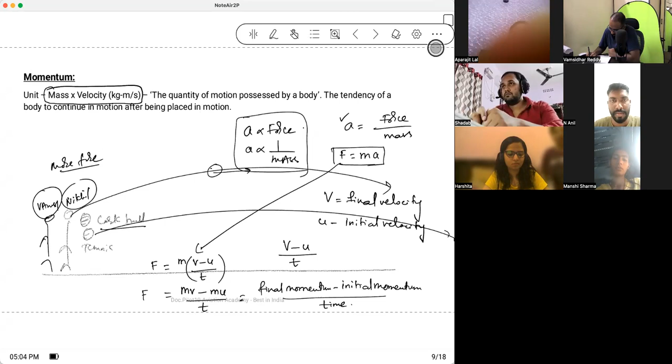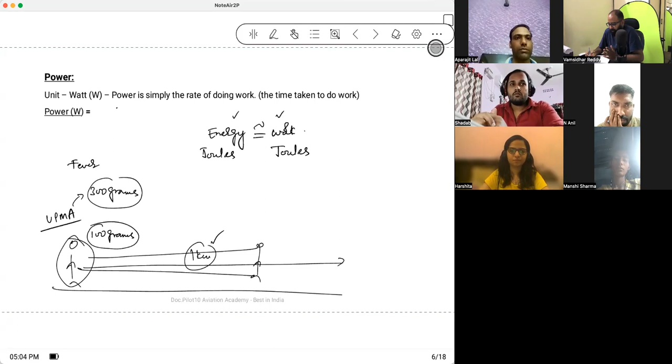In the last class, we have seen some basic things like what is energy, what are the Newton's laws of motion, what is kinetic energy, what is actually meant by work, what is power, the basic stuff. Correct. Now we will go a step ahead in this class, and I will teach you some things about atmosphere, not everything in detail. Atmosphere in detail is learned in meteorology. Here, I'll just give you the gist of what is actually needed for understanding lift, drag, etc.

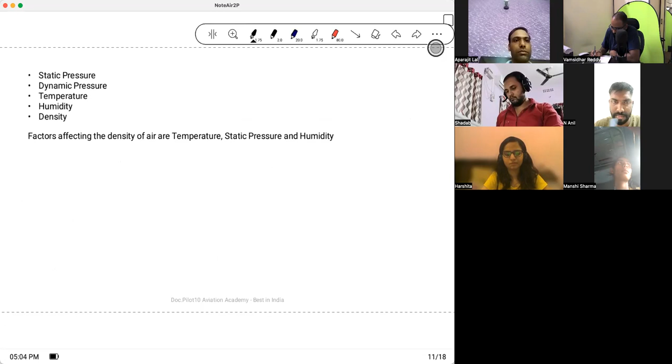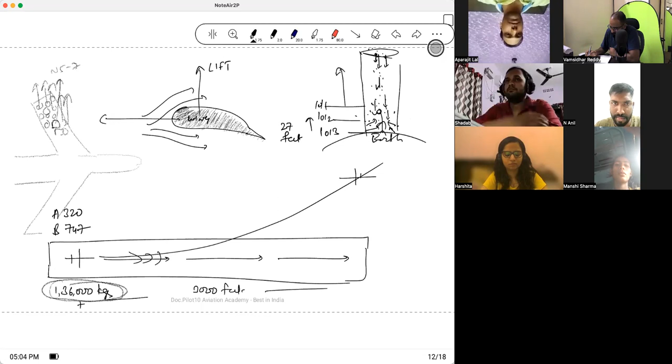Correct. Now I'll discuss every factor mentioned here to some extent. After this, I'll be teaching you two things. One is the principle of continuity. Then, based on this principle of continuity, I'll teach Bernoulli's theorem.

See, this Bernoulli's theorem, I will teach it in two fashions. First fashion will be what is there in the book. The second fashion, I'll teach the reality: how you put this Bernoulli's theorem to make an aircraft produce lift.

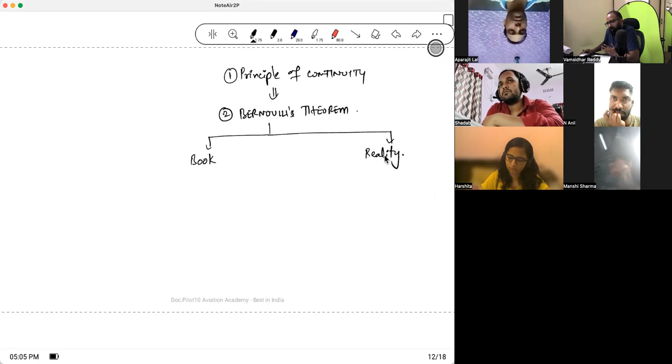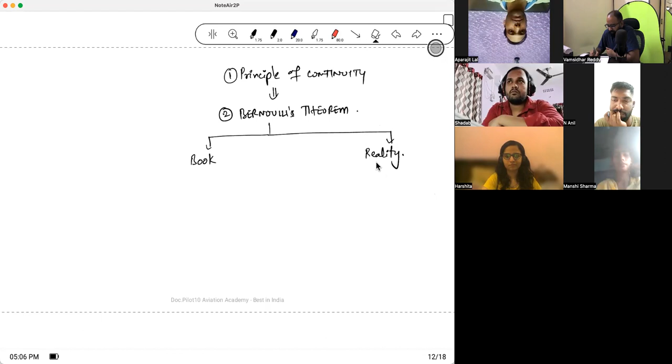Okay. So if you have attended navigation for the last 2-3 days, it is like I'm repeating a lot of things, but there are students who are coming directly for technical general classes, so for them it is like Greek and Latin if I go fast. So you will be thinking, sir is repeating too much, because you attended navigation and the same concepts are here. This will be our plan today. I'll try to complete as soon as possible.

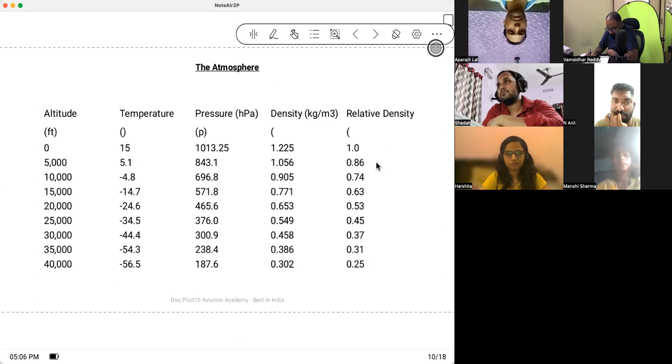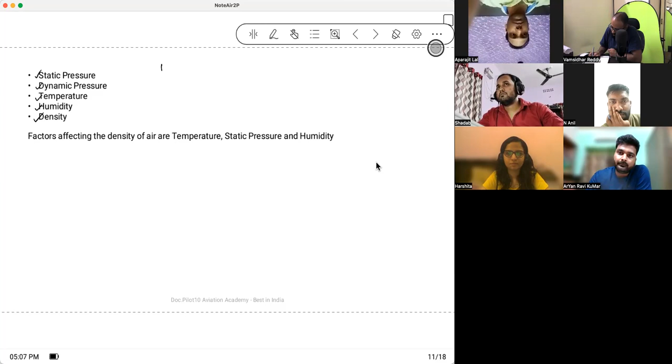Now, fine. Did I explain static pressure and dynamic pressure in last class? Just remind me here in technical general. No, sir. Only in brief. Correct. See, if I say the atmospheric pressure is equal to 1013.25 hectopascals, Zara, what do you mean by 1013.25 hectopascals? Sir, it's the pressure that any body will feel standing at sea level.

Correct. Anyone, any aircraft or any human being at sea level will feel 1013.25 hectopascals static pressure. That means assuming the air around the human being or the aircraft is not moving at all. So this is static pressure, 1013.25 hectopascals. Did I convert it into PSI? Yes, sir. So you understand how much is the force of the static pressure.

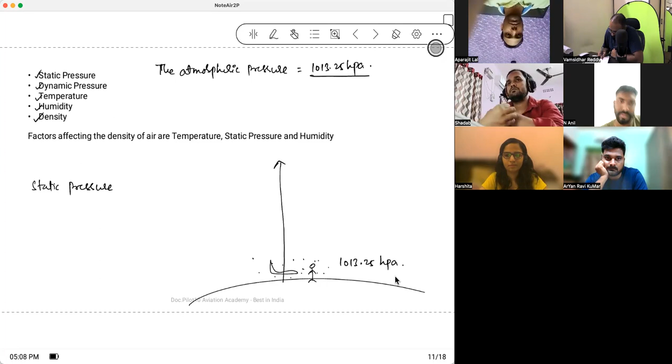Now, see, as you go up, what happens to the static pressure? It decreases. Correct. So by how much? Every 30 feet. Every 27 feet, correct. Static pressure decreases as you go up by 1 hectopascal per 27 feet. So this is static pressure.

Now, did I explain what happens in a fast moving car if you put your hand out, in the technical general class? It will push. What happens, Zaara? No, sir, you didn't take this example. Okay. Fine. I have explained it in navigation.

Zaara, do you have a car? No, sir, but I have experience. So whose car was it? Your dad's? No, a hired car. So does your driver drive very fast? Yeah, sometimes on the highway. What is the maximum speed? Maximum I have seen 80 to 100. 80 to 100 and you're thinking that is fast. Because in our family, everyone drives so slow. You are the one who is going to go at 200 knots. Rotate. Yeah, that's why I want to set an example. But people go up to 150, 120, I have seen friends putting it in their Instagram stories.

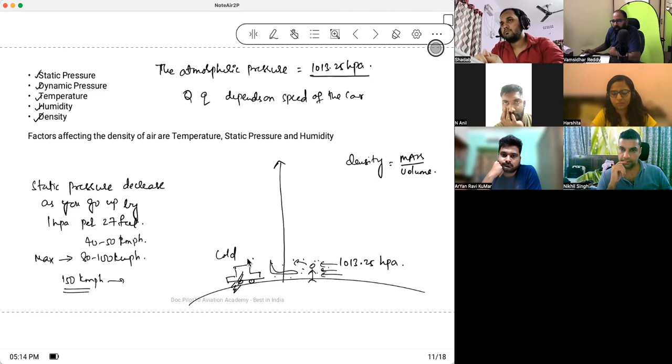Okay. See, what is meant by density? The closeness of molecules in a substance. Density is nothing but the mass contained per unit volume. Yes or no? Let's say this is Hrithik Roshan's car, this is Hrithik Roshan's hand. Today, let's say it is very cold. When it is very cold, what happens to the density of air around the car? Increases or decreases? Increases, correct. That means molecules are closer to each other.

Many molecules are hitting Hrithik Roshan's hand rather than less number of molecules. So that means in winter, at that speed, if you put your hand out, it will pain more. So dynamic pressure depends on the speed of the car, and also depends on density. Am I clear on this?

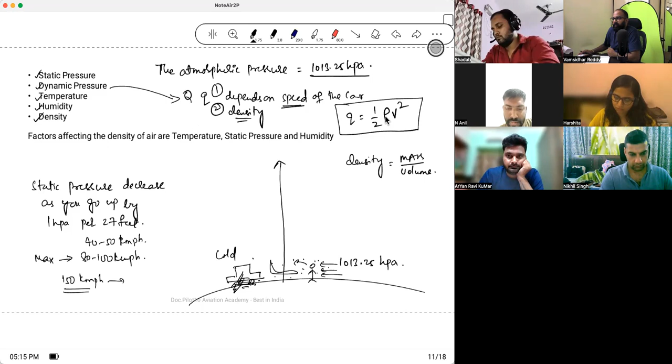Yes. Now, dynamic pressure is equal to half into rho into V square. This is the formula for dynamic pressure: Q = ½ρV². Rho is density, V is speed, and Q represents dynamic pressure. Am I clear on this? Okay.

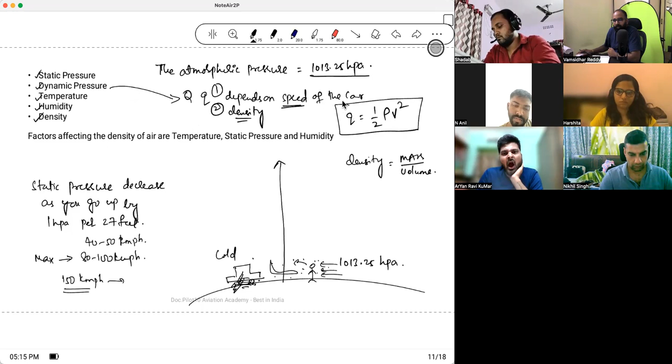Now, let's take Delhi. This is a hill. This is Shimla. Let's say Delhi is at mean sea level. Assume. Now Shimla is on a hill which is away from mean sea level. So this is a runway in Shimla. So this is Shimla.

Now, first scenario, pressure. Where is the pressure more, Delhi or Shimla? Delhi. Why? Because the altitude of Shimla is high, and as we move upwards, pressure will decrease. Correct. Because see, if you take this as earth, this is Delhi, this is Shimla on a hill. All the air molecules are there like this. Delhi is at a lower level, so it has more weight of these extra molecules than Shimla. So Delhi has more pressure than Shimla.

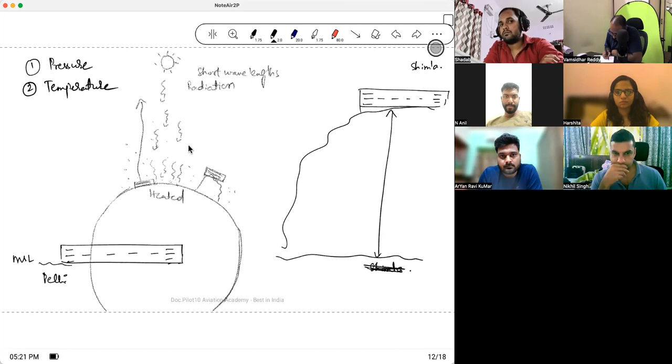The air molecules above them are heated less because the heat has to pass. The air molecules above them are still less heated. So that is the reason as you go up from the Earth, the temperature decreases. So what is this called? Decrease in temperature with height, from meteorology? Lapse rate.

Correct. So until tropopause, what is the lapse rate? It is 1.98 or approximately 2 degrees centigrade per every 1,000 feet. Okay. So this is the lapse rate. Am I clear on this?

Now see, Shimla is here at a higher level when compared to Delhi. But 90% of the earth is heated from here. So this air keeps on moving sideways also. So the air at Shimla is coming from a place over Delhi or nearby areas. Yes or no? That means whatever temperature is at this level will be at Shimla also. That is the reason Shimla is colder.

You might say, sir, earth is being heated from the bottom, Shimla is at a higher level, but under Shimla there is ground, it should heat the air. But no, the wind also moves like this. If this is Delhi, this air might have moved over to Shimla, and this air over Delhi is cold because it is at a higher level. So that's why Shimla is cold. Understood?

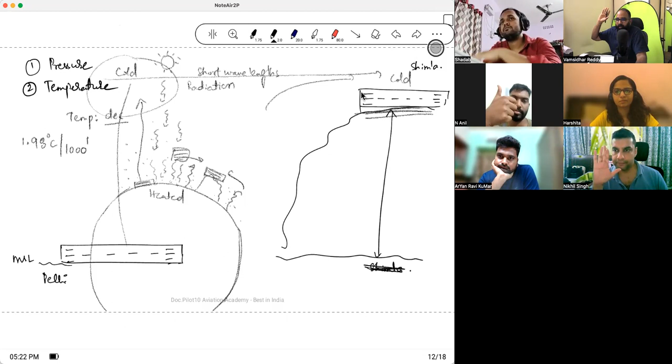How many of you understood the real reason behind it? Clear? Good. Fine. Now Shimla is cold. Third question. If the same aircraft has to take off from Delhi and Shimla, which airport will need a longer runway?

Delhi. Delhi or Shimla? Who said Delhi? Raise your hand. Nikhil. Others? Delhi. Sanesh. You are going to kill someone.

Sir, can you please repeat the question? See, Delhi and Shimla, same aircraft is taking off. Which will need a longer runway for takeoff? Delhi airport, sir. Think. It's Delhi only, you're trying to trick us. You taught us only in navigation. The answer is Shimla. Now at least try to think of an explanation. The answer is Shimla.

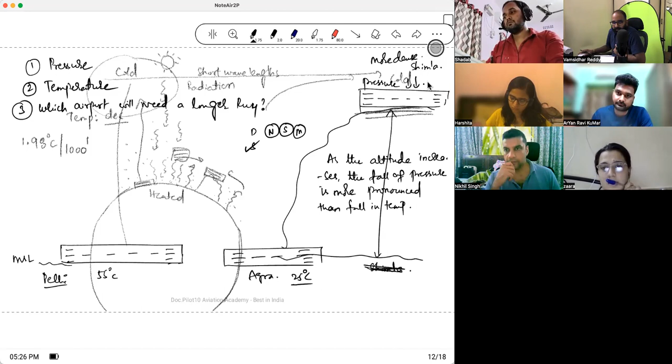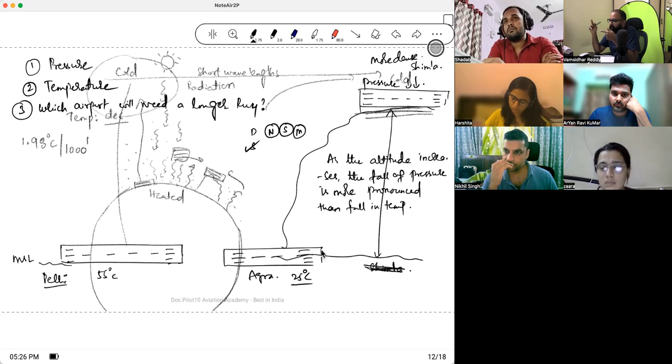Yes, sir. Fine. That's why Shimla will require a longer runway than Delhi. Whenever you are taking off in very high altitude regions, be very careful. Calculate everything. Take out your POH and look at every table. What is the payload you are carrying? What is the length of runway you will need? What is the length of runway you have?

It is very important never to cross here, because pressure is less. If pressure is less, density is less. Correct? There is no air over the wings at higher altitudes. It is very thin air. Understand? You need a longer runway. Shall I move on? Yes, sir.

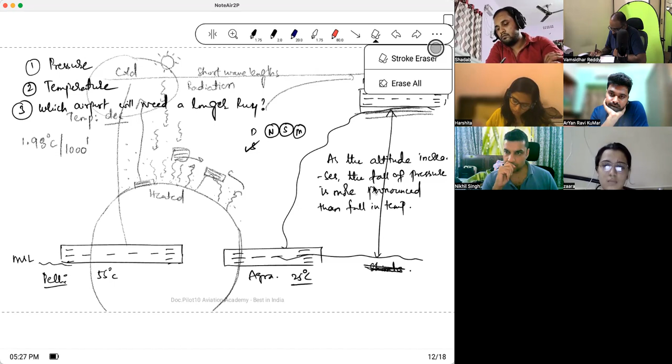If I am clearing it, it will not come back. Let's assume two places. This is the runway at Hyderabad. This is the runway at Chennai. Same aircraft, both in Hyderabad and Chennai. Today in Hyderabad and Chennai, both temperatures are 30 degrees centigrade. Okay. So I'll ask you a different question. Why always only this?

Which pilot will bathe twice? Chennai. Due to humidity, sir. Yes, sir. Because of humidity. Okay. So what is their humidity? See, there is humidity. Explain to me why he has to take a bath twice. So same temperature, na? See, same temperature, correct? So you said humidity is more in Chennai because it is surrounded by sea, correct? Yes. So then what? So what?

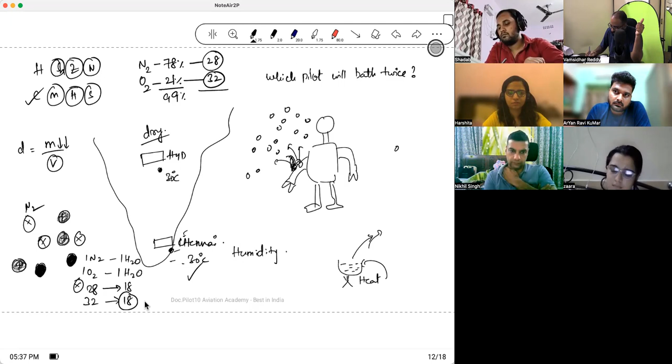Density is mass per volume. You are taking 1 liter, this is constant. So mass is decreasing for that same volume of air. So can I say, if there is more humidity in the air, the total weight or density of air will be less? Yes. Correct. So write down: more humidity implies density decreases.

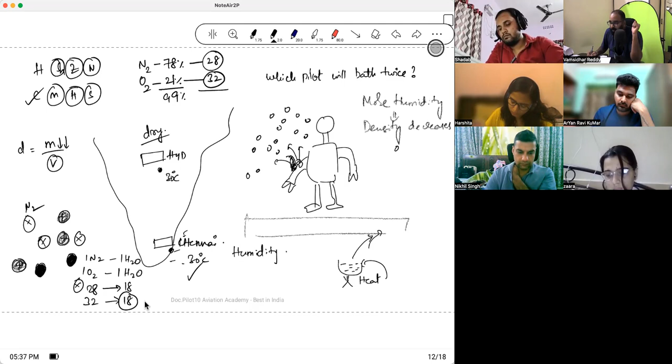Now see, if you take a wing, lift is dependent on the number of air molecules flowing over the wing. The mass of air flowing over the wing is less when there is more humidity. That means lift generated is less, so you have to move faster for takeoff to produce the same lift and be airborne. So in Chennai, it will use a lot of runway, while in Hyderabad it will take a shorter length of runway to take off.

Now, question. If the humidity of air increases, what happens to the performance of the aircraft? Decrease. Correct. Here it is performing less, here it is performing good. If temperature increases? Decreases, density decreases. If density of air increases? Increases.

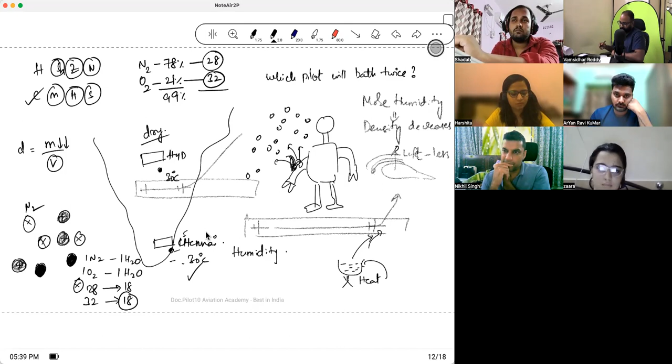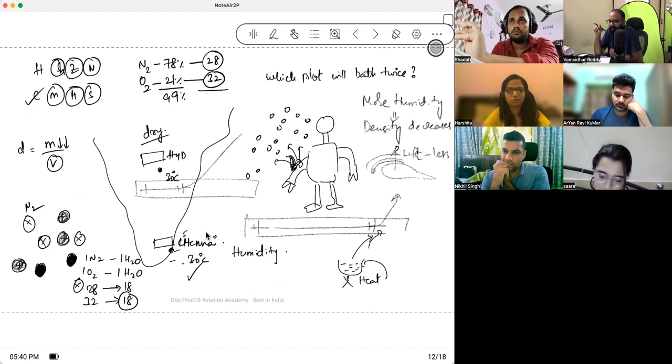If altitude decreases, altitude means vertical distance from mean sea level. What happens to the performance? Increases. Very good. This is all you need regarding atmosphere. Anshi, did you say something? Can you repeat the last point? The question is, if the altitude decreases, what happens to the performance? Then it increases. Okay.

Fine. Shall we move on to principle of continuity? Yes, sir. See, what is the difference between a fluid and a liquid? So fluid is thicker than liquid. No. Sir, more tendency to flow. No, both have tendency to flow.

What are the three states of matter? Solid, liquid, gas. Correct. Air you cannot call a liquid, it is gaseous. Solid you cannot call liquid. Now you understand what is liquid. What is fluid? Anything which takes the shape of a container, flows freely or can be compressed is called fluid.

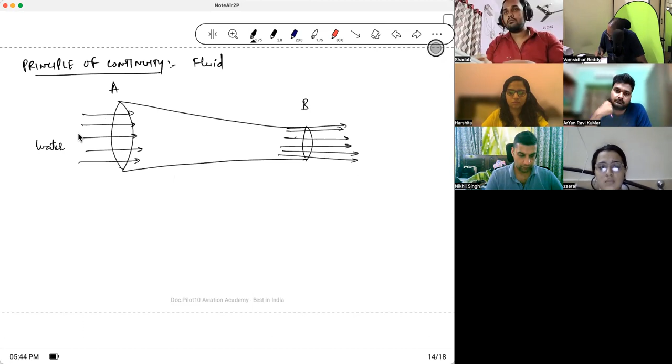Mass flow per unit time is constant. For example, if there is a machine pumping water at, let's say, 200 kgs per minute, this side also 200 kgs per minute should come out, but because the opening is less, they come very fast. Understand? So according to the definition, mass per time should be constant. I am sending certain amount of mass of fluid from one end, and I should get out same amount of mass of fluid at the other end.

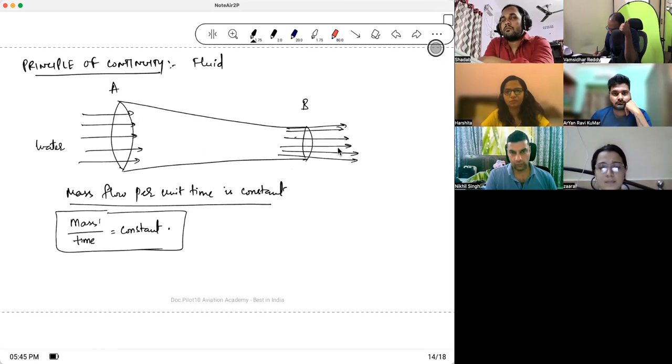Now, what are the variables here? First thing, the area of cross section is varying. At different parts of the pipe, the cross section is different. So variables. Can someone say what is the second variable? Speed of the flow. Very good. Here it is slow, here it is fast. So velocity or speed is a variable.

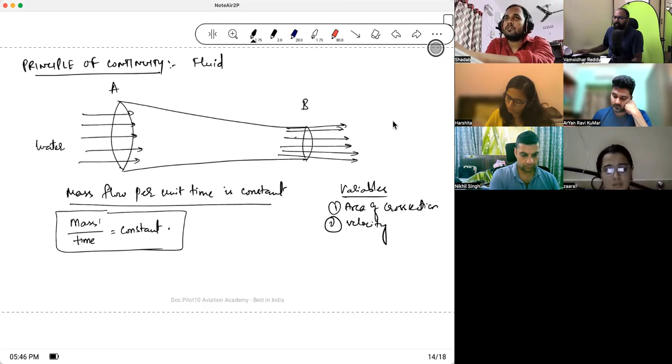Can I say sometimes because of high pressure, the molecules can be a bit compressed at this end? For example, if this is air, the air can be compressed here. So another variable is density. Area of cross section, velocity, and density. Now, if I multiply area of cross section into velocity of fluid into density of fluid, what will I get?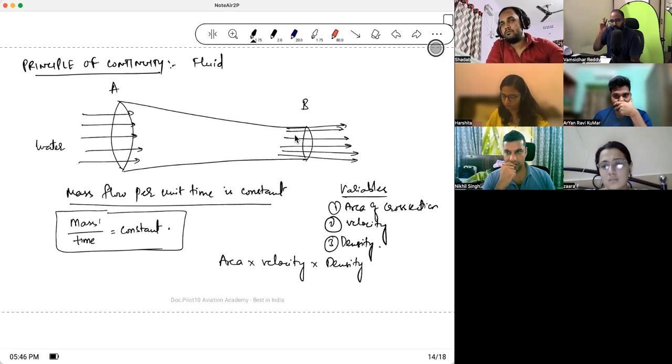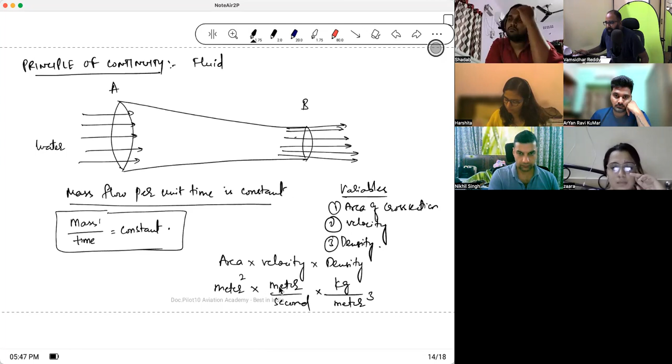See, what is the unit of area? Meter square. What is the unit of velocity? Meter per second. What is the unit of density? Density is mass by volume. Kg per meter cube. Now, if I take a look carefully, meter square and meter will cancel with meter cube. Now, what is left? Kg per second, or mass per time.

So can I say area of cross section into velocity of fluid into density is nothing but mass per unit time of the liquid flowing, and this will be constant. Can I say that? See, if you don't understand this, you will not understand Bernoulli's principle. If you have any question, you ask me. Don't make up questions.

Shall I move on? Sir, can you explain the variable of density? How will it be? See, I am talking about fluid. Let's assume instead of water, I am sending air. Here it is very high pressure, because it is getting constricted. Or see, air density can vary at any point of time. Probably someone has put a fire here and it is heating the air. So density is decreased, and because density is decreased, it should move faster.

So density is variable. Probably change in temperature across the tube also. So it gets compressed also somewhere else. Yes or no? Yes, sir. So density is a variable. Now, how are these three variables related to each other? That is what I thought. So I just tried multiplying these three.

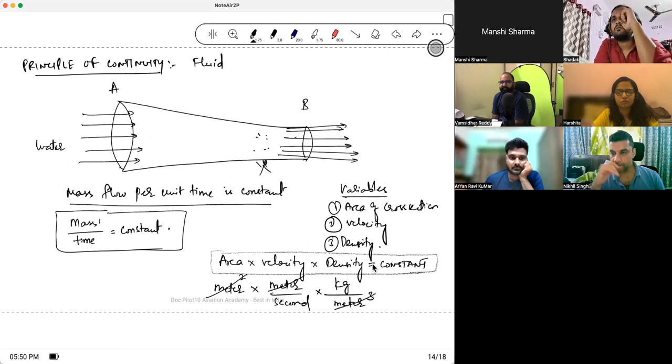How many of you think air is compressible? Can you give an example? So like car engine, the combustion. Those are the gas we use in our homes. That's very good. Gas we use in our home. So it is a compressed gas. Correct. The air is compressible, but under very high pressure.

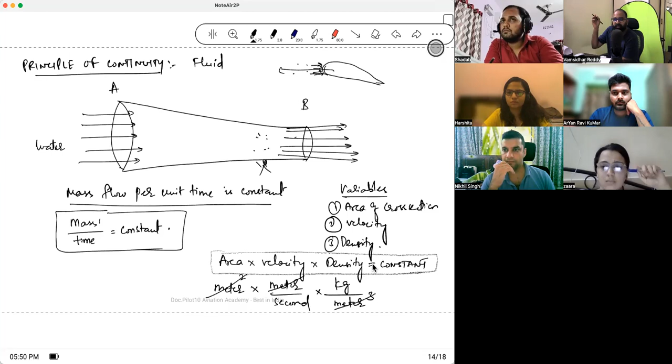Have you seen the machines which pump the gas? They push it with a lot of pressure. Okay. Air is compressible, but it is not very easy for air to get compressed. Correct. For example, if this is the wing of the aircraft moving forward like this, the air molecules are hitting this, and this morning we discussed compressibility in the navigation class, adiabatic heating. That means I said air here will get compressed.

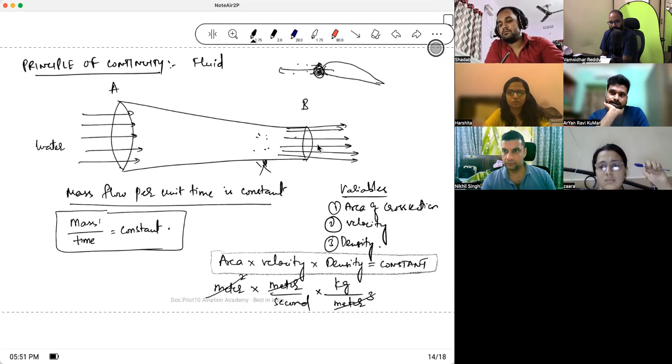But generally this does not happen at subsonic speeds. It will happen at very high speed aircraft. You understand? So generally air is not compressible below 0.4 Mach. In the Mach meter, I'll teach you again in navigation. So air is incompressible below 0.4 Mach. Now, in this case, what is constant? Which became constant? Density became constant.

Density. Correct. Now, from this, can I write, if I am flying an aircraft at subsonic speeds, area into velocity is constant, because density is also a constant value. So can I write area is inversely proportional to velocity. That means if the area of cross section halves, velocity will double. If the velocity doubles, that means area of cross section has become half.

How many of you understood this? Got it, sir. Yes, sir. So this is the first question I asked here. Because the area of cross section is less here, what happens to the speed? You said speed will increase, but how much? If it halves, the speed will double. As simple as that. So it is inversely proportional by a factor of 1. Shall I move on? Now, based on this, Bernoulli came out.

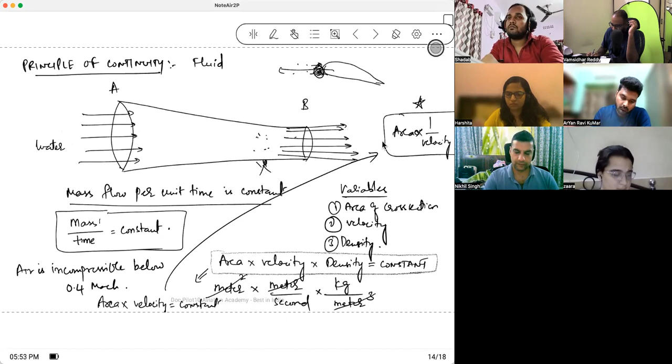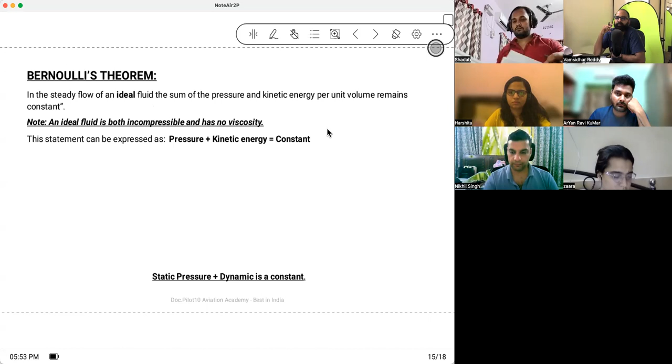Now, Bernoulli's theorem is defined for ideal fluid. What is an ideal fluid? See, fluid you know is something which flows. What is an ideal fluid? An ideal fluid is something which cannot be compressed and will not stick with other molecules. So Bernoulli's theorem is defined for ideal fluids.

Now, a lot of the aircraft fly below 0.4 Mach, your Cessnas. Initially when aircraft were built, all were subsonic. So Bernoulli's theorem was applied for everything. Even for high speed jets, the compressibility is very low for air, so Bernoulli's principle will still apply. Air is close to an ideal fluid, but it is not an ideal fluid. Because it is not ideal, at higher speeds you have something called shock waves. We have discussed this in the Mach meter. How many of you understood what is ideal?

So Bernoulli's theorem states that pressure plus kinetic energy is constant. See, how did I say I'll explain Bernoulli's theorem? First, according to the book. Second, in a very practical sense.

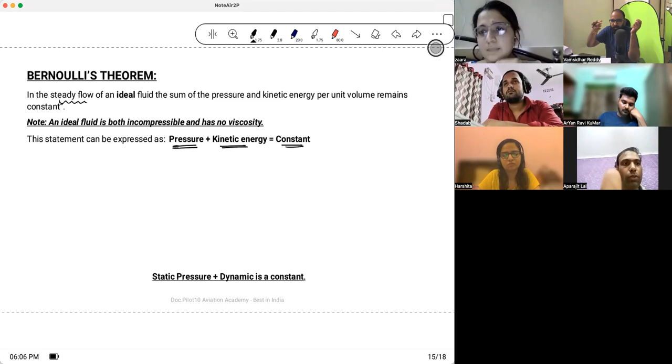See, Bernoulli's theorem states that if a fluid is in a steady flow, for example, when you turn on a tap in your washroom, the water can come like that. Or if you go to a very good hotel, like 5-star hotels, the water will come very smoothly out of the tap, and once it falls on the sink, it will not splat, it will spread. So steady flow means the fluid flowing in an orderly fashion.

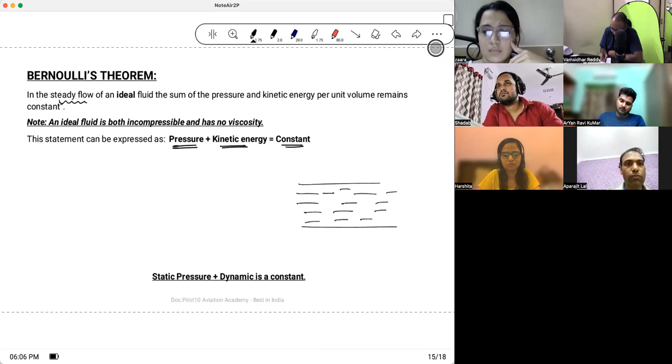For example, in a river the flow is turbulent. That means it will go like this, like this. Or when the water is calm, the water flow will be steady. So steady flow means orderly flow. When it is flowing orderly, the molecules will travel in straight lines. They will not cross each other. But when the flow is turbulent, the streamlines cross each other. So the meaning of steady flow is orderly flow.

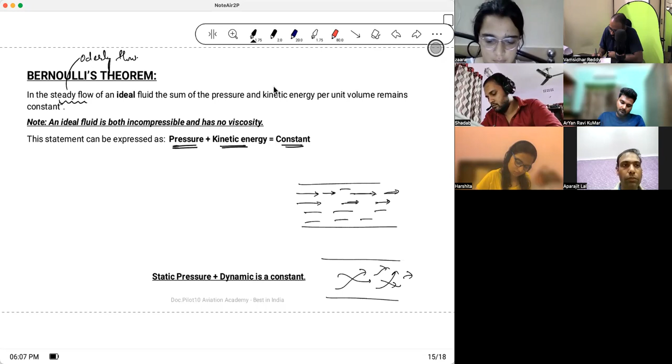Write down: the streamlines do not cross each other in a steady flow. Now, what is a streamline? If you take a single water droplet or molecule, the path followed by it is called a streamline. The path followed by a single fluid molecule.

Correct? So it says here, if the fluid is, first thing, ideal, and if the flow is steady, that means the streamlines are not crossing each other, then you take any cross section, here or here or here, A, B or C, correct? At any cross section, the pressure exerted by the fluid plus its kinetic energy will be constant. This is what it says.

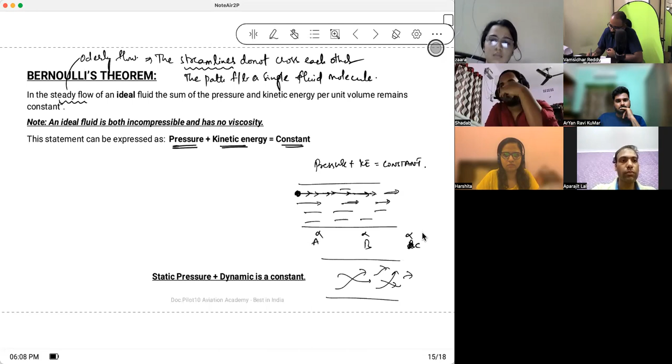Okay. And there has been an explanation which I believe is a stupid explanation, but anyway, it is given in the Oxford, so I'll do it. And then I will give my own explanation to this Bernoulli's theorem. Okay. Bernoulli 2.

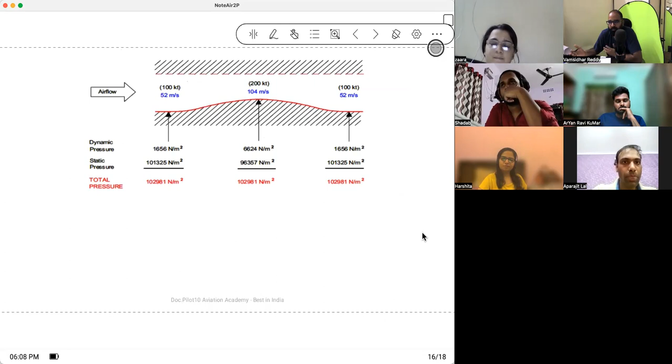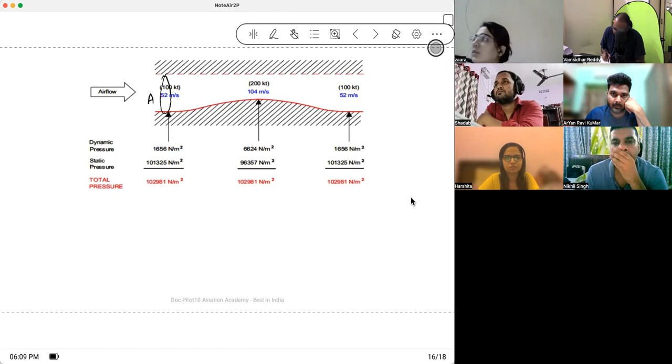Fine. Let's take air is flowing. Air is a fluid, correct. And air is close to ideal fluid. Now air is flowing. For this cross section, let's say the area is A. The pressure is 1013.25 hectopascals. I'll take normal atmospheric pressure at mean sea level, correct?

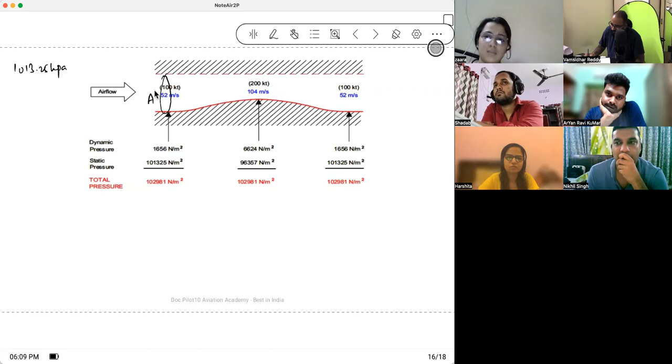See, 1 hectopascal is equal to 100. Pressure is force per unit area, Newton per meter square, correct? So this is the true conversion. So can I say here the pressure is 101325 Newton per meter square? So can I say static pressure is 101325 Newton per meter square, correct?

Let's say here the air is moving at a speed of 100 knots. In meteorology, you would have seen it in the jet streams. If you convert, 1 knot is equal to approximately 0.5 meter per second. If you convert nautical miles per hour to meter per second, it is almost half. So 100 knots will be equal to 52 meters per second.

Now, if I calculate dynamic pressure, half into density into V square. This is the dynamic pressure. So it is half into density of air, how much for this pressure? ISA conditions. 1225 gram per meter cube. So I want it in kgs: 1.225 kilogram per meter cube. Correct?

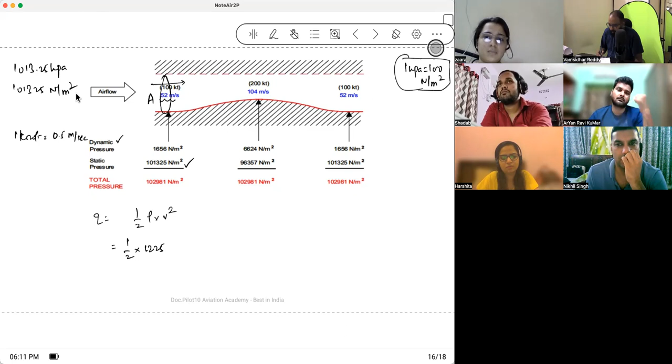Into V square. Speed is 52 meters per second. 52 into 52. If you solve this, you will get 1656 Newton per meter square. How many of you understand? Now they say dynamic pressure plus static pressure is constant. If you add these two values, you will get this value.

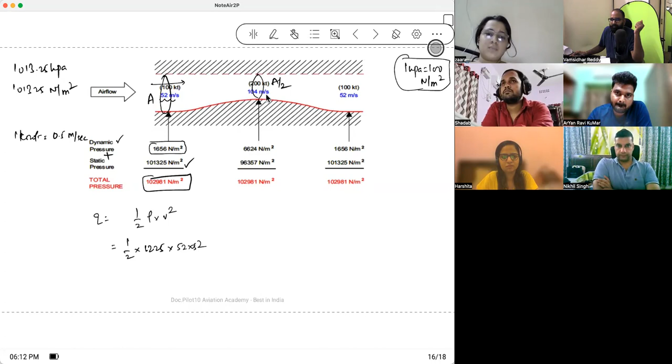Am I clear? Now, from the principle of continuity, if the area of cross section is A by 2 over here, what will be the speed of the air? Will it double or not? Yes, sir. Okay. Now let's say 200 knots, 104 meters per second. Now calculate dynamic pressure.

Half into, see, because we took ideal fluid, it is incompressible, 1.225 into 104 into 104. So if you solve this, you will get 6,624. Now Bernoulli's principle says that dynamic pressure plus static pressure is constant. So because this plus static pressure should be this, you will get static pressure as 96,357. Am I clear on this?

That means here, if the area of cross section decreases, what happens to the kinetic energy or dynamic pressure? It increases because the air moves faster. Now, the air exerts pressure on the walls of the tube like this. That is called static pressure. So, because dynamic pressure plus static pressure is constant, the dynamic pressure has increased, the static pressure has decreased. The pressure exerted by the air here is less. Am I clear on this?

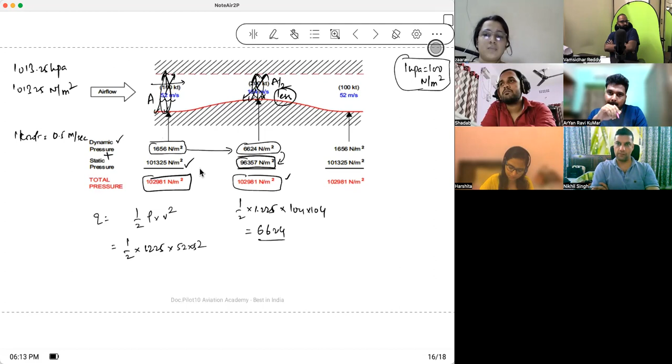Now, this is Bernoulli's principle, no doubt. And I will tell my own Bernoulli's principle. It is all given in the notes here. I have given you the notes. It is all there.

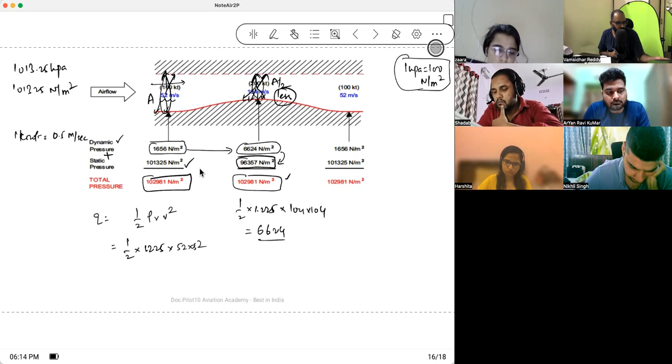Okay. Next. So, how did they calculate the static pressure over here? I assumed it to be atmospheric pressure, ISA conditions, 1013.25 hectopascals. If I convert to Newton per meter square, 1 hectopascal is 100 Newton per meter square. It is a fact. Okay. Got it?

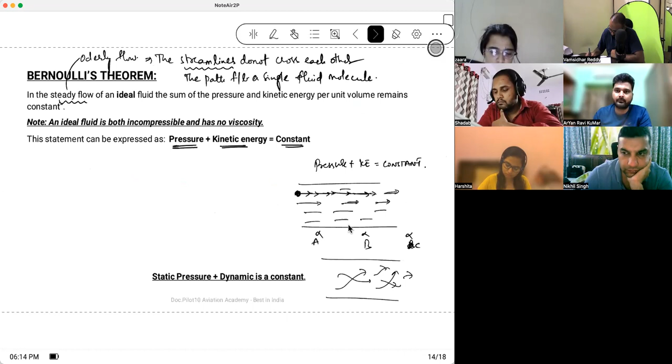Now tell me, is the tank generally made of cheap plastic? If you make the tank out of cheap plastic, with so much pressure, it will burst. Static pressure will break the tank within a few hours. Generally, it is made of concrete walls. Have you seen the big apartment tanks? They are not made of plastic. Probably on a small one-floor house you can make a tank out of plastic, but on an apartment building, plastic tanks are never used.

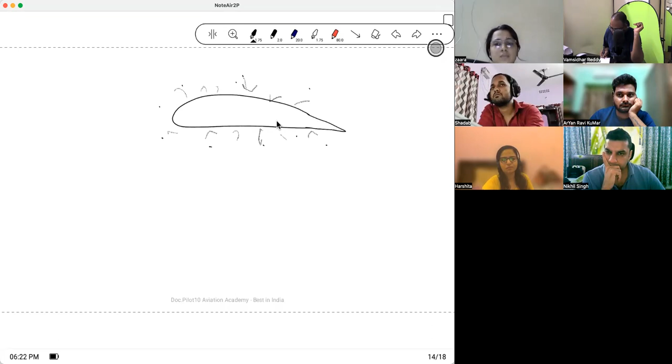Now, the aircraft is at rest, stationary on the ground. Now, what happens? The air molecules around the aircraft are in random motion and hitting the body of the aircraft. So that is called atmospheric pressure felt by the aircraft wing. And how much is that? At mean sea level, it is 1013.25 hectopascals, or if we convert, it is around 7 kgs per inch square. That means on 1 inch of aircraft wing, 7 kgs of pressure is exerted.

It is exerted above also. It is exerted below also, because air is continuous. So from all directions of the aircraft, this pressure is exerted. If it is exerted only on the top, the aircraft wing will break. It will get buried into the ground within a second. But it is not so, because it is exerted from all sides. Till here it is clear. Now be very careful. I will mix Bernoulli's theorem here.

Now, as the aircraft moves forward, what happens? The air molecules will start sliding over the wing like this in streamlines, because air is incompressible at lower speeds, and also the air is close to an ideal fluid. So generally the flow will be streamlined. But now if you take the bottom of the wing, the curvature is not so much that it will accelerate. Do you see where the curvature is more?

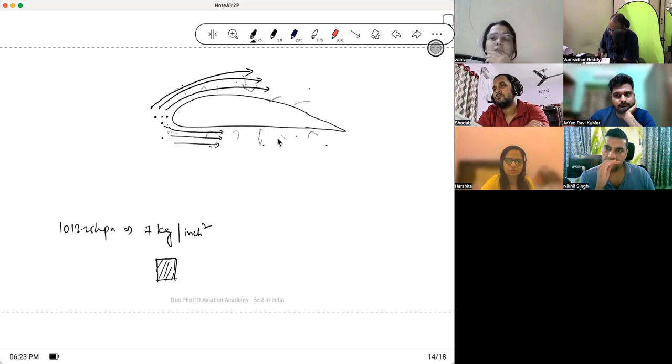If this is the center of the leading edge, this is the top of the leading edge. The curvature is more on the top than the bottom. Now, where will the air accelerate more? Where will it attain more speed? Upper or lower?

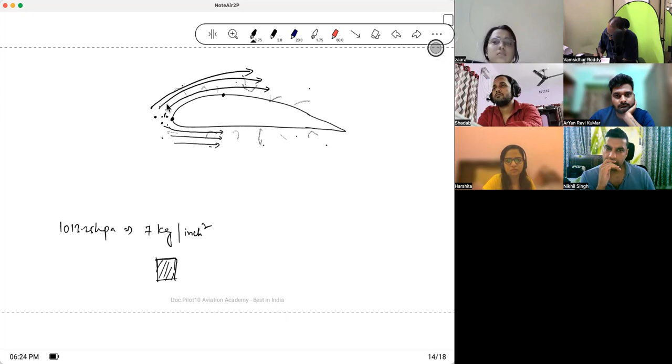On top, it will attain maximum speed. See, air has to travel this much distance in less time, but below the wing air has to travel only a small distance, this much. Correct. So air will accelerate more over the wing than under the wing. This is how an aerofoil, or any structure which will generate lift, is designed. Till here it is clear?

Where will the air accelerate more? Above or below? Above. So air will accelerate more above the wing. Correct? Now, there is something called a boundary layer. What is a boundary layer?

See, if an aircraft wing moves forward in air, the air closest to the wing is taken along with the wing. The air in the next layer will also be taken forward, but a bit less. Here it will be a bit less disturbed, and at some point these air molecules will not be disturbed. So where the air molecules are undisturbed is called the boundary. That means this much thickness of air is being disturbed. You understand? Now, can I draw a boundary layer like this?

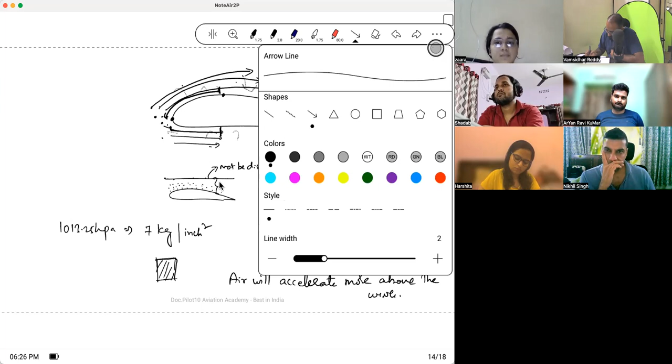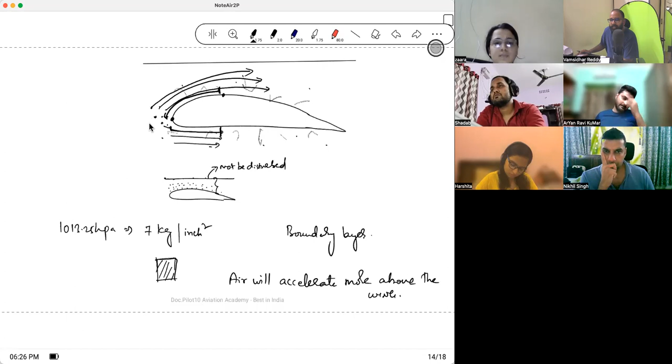I'll draw a neat one. Do you see this? Okay. Now, initially here the air was normal, it was undisturbed, and it got accelerated. When it was undisturbed, that means the aircraft did not come to this position. Let's say this is the undisturbed air point. That means here it was exerting atmospheric pressure of 1013 hectopascals, or 7 kg per square inch.

But once the aircraft came here, it started accelerating in one direction. Yes or no? So when it started accelerating in one direction, what energy did it gain? It gained kinetic energy. That means the ability of this air to exert pressure on the wing, did it decrease or increase? Pressure decreases because it gets converted into directional motion, which is kinetic energy. Same like the water in the pipe. It is not exerting pressure on the walls, it is giving kinetic energy so that you can enjoy your shower. So here on the surface of the wing, it is not 1013. It is far less than 1013.

Now, where is the acceleration more, on the top of the wing or below? Top of the wing. So kinetic energy is more above. That means pressure is less above the wing than below the wing. So here pressure is less compared to the bottom of the wing, where pressure is relatively more. High to low. Bottom of the wing is more pressure, top is less pressure. That means lift is generated in this direction, on every square inch of the wing. You understand? How many of you understand this?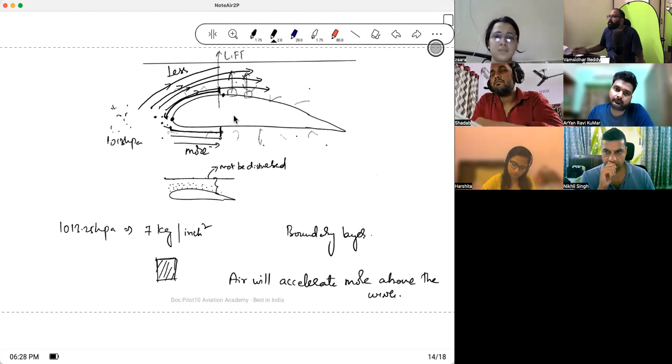Now, let me tell you how this is related to the principle of continuity and your Bernoulli theorem. Listen carefully. Can I draw a cross section here like this? And like this? Three cross sections. Now, if I remove the bottom of the wing, just imagine this was the initial pipe I made. This is one cross section, this is the second cross section, and probably it will expand and become the third cross section.

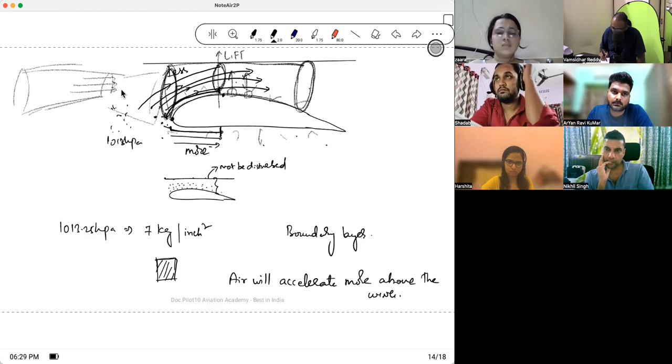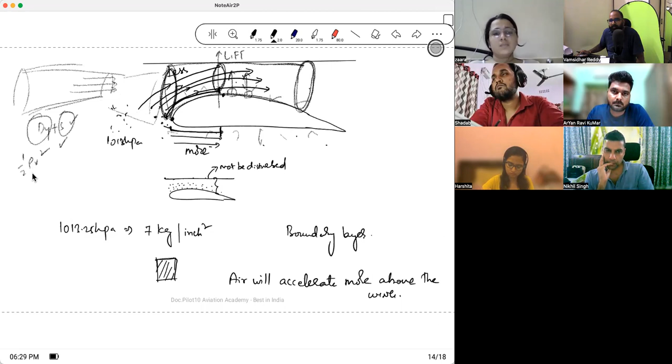So Bernoulli's principle tells the same thing. Here, as the air accelerates, its energy is constant. That means dynamic pressure plus static pressure is constant. Static pressure is nothing but the pressure energy. Dynamic pressure is nothing but the kinetic energy, half into rho into v squared. So now static pressure is less, meaning the actual pressure is less, and that is how lift is generated. How many of you really understand? If you do, I'll ask you a simple question.

How do you drink your Pepsi? Harshita, have you ever been to KFC? Veg or non-veg? I'm a recent vegetarian, I've been to both. Forget it, no more discussions on this.

So they gave a Coke full of ice cubes. So how did you drink? Sir, with a straw. Then how? The Pepsi is there in the container. Show me. They gave the straw only. Imagine this is a straw. See, for example, this is your Pepsi. Now there is Pepsi here, and there is a straw here.

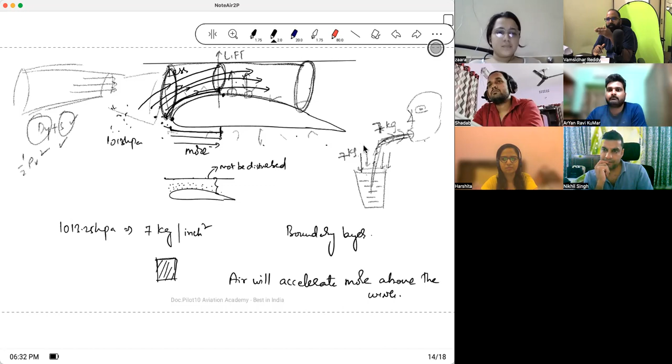Understood? So when you created a vacuum, this air is not there inside the straw. The air is not there. It is vacuum. Now the outside air exerted a pressure of 7 kgs per square inch on the Coke. That will push the liquid into your mouth. For example, can you go to outer space and suck like this? No, because there is no air.

You understand? See, same way, here lift is not generated because something is pushing the wing from the downside. Lift is generated because the pressure on the top of the wing is made less when compared to the bottom of the wing. See, you are not sucking the Pepsi inside your mouth. That is what you feel. But the actual thing is, you're just removing this force inside the pipe due to air, and the atmosphere is pushing the Coke into your mouth. You understand? Between the real science and the feel what you get.

You got it? So in your life, every instructor will tell you that lift is generated from the bottom. The wing is being pushed because the air comes and hits here like this. That is complete bullshit. It is because the airflow causes a decrease in pressure on the top of the wing. That decrease is more when compared to the decrease in the bottom of the wing. That will lead to an upward force called lift. These are the super clear concepts. If someone says otherwise, they are talking nonsense.

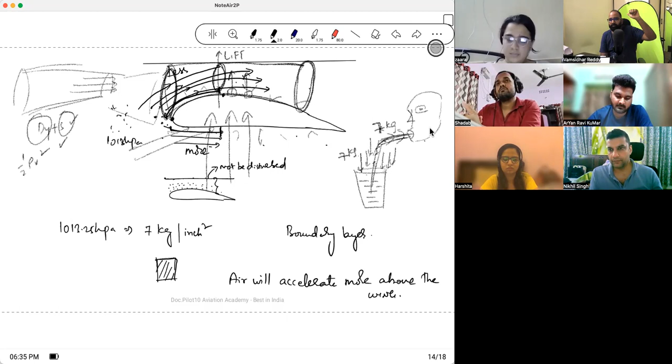Okay. Now tell me, did the Wright brothers discover the aircraft first or Bernoulli make the principle first? No. See, the two events were completely different at different points of time. So once the aircraft was getting designed, the Wright brothers correlated these things, and then they said, okay, Bernoulli's principle explains why the lift is being generated. Whatever the Wright brothers used, the ailerons, rudders, even today in the modern aircraft, we are still using the same technology to fly.

So we have not improvised. We have improvised a bit. That's all. Flaps, slats, etc. are there. Air brakes, spoilers. But most of the flying, 99% of it, was discovered by the Wright brothers, and we still fly the same way. No new technology has ever come into place when flying aircraft. Am I clear on this?

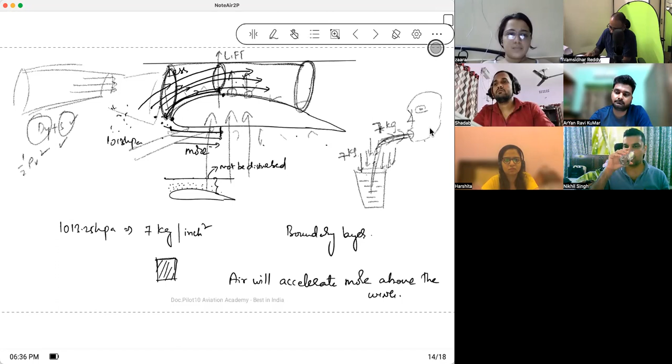Interesting? Class was interesting or boring? Yes, sir. Okay. Now read the theory. So the technical general class will not have much homework except you can do bits from the Oxford. Okay. Next.